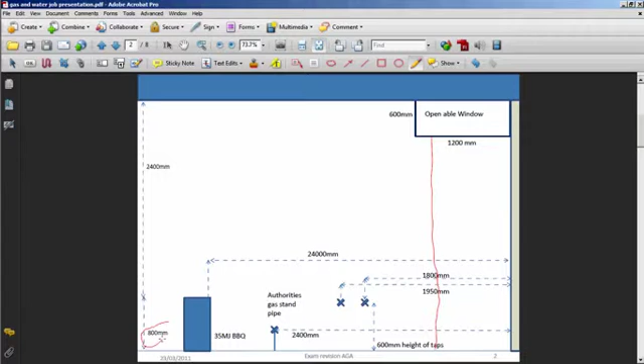Alright, make sure you take those two measurements into account when you're working out where you're going to put your hot water service.

Make a provision for the installation of the gas meter, which is getting at where you're going to bring your copper pipe up to meet for so the gas meter can be put on.

Should have a drawing in the front of your regs. So it's 330 from the authority standpipe to your standpipe, 200 off the ground, something like 200 mil off the wall. You should have that drawing in the front of your regs stuck in.

So that bit's easy. Use your minimum pipe sizes from the meter position to the hot water unit and leave a sealed branch. When they say a sealed branch, they're talking about a compression going to a male with a cap on the end. All right, don't just crimp and seal it, silver solder it.

Test the consumer piping as per the standard. Make sure you're on. It's all on your standard. You should have all that sorted out before you get to the exam.

With either of the appliances connected, or if they're not connected, what the operating pressure is, so you can work out how much you need to pressure test it too.

When you're sizing the pipe, make sure you're looking in the right column for the sizing. Don't fall into the trap of reading into the wrong column. You'll end up with the wrong pipe size.

Page 101 talks about flue clearances from the flue terminal. You need to look at that when you're putting your hot water service on the wall.

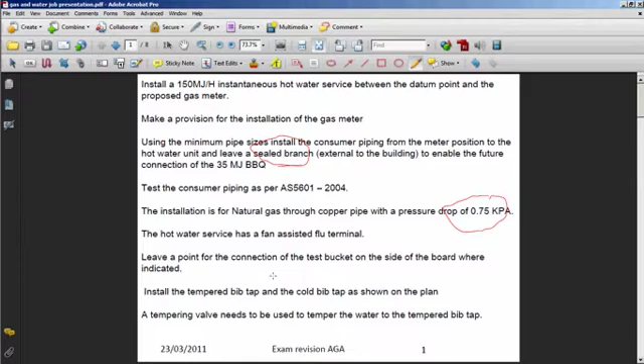Install a tempered bib tap. In the plan, your tempered bib tap's there, and that's your cold water tap. Install a tempering valve, needs to be used to temper the water to the tempered bib tap.

Right, so there's the plan. This is where you'll install the job. So the side of the board there is your datum point, and the door's there. So you got to make sure you got your clearances away from there. Your window works out to be way up here somewhere.

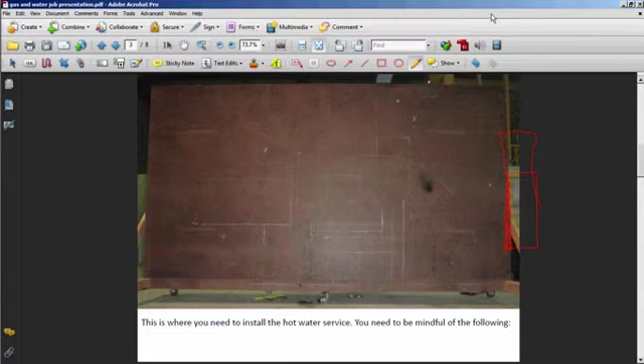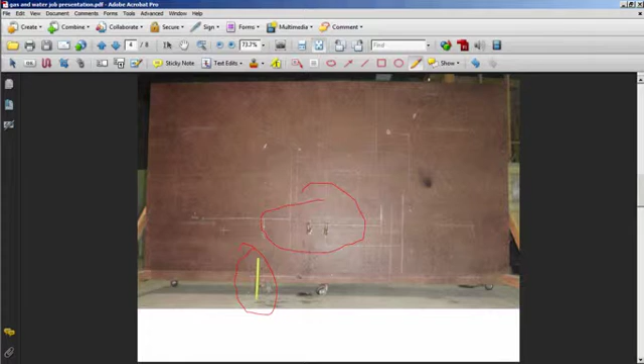First thing I do is stick your taps on and stick the gas authority's pipe on, because those points are fixed. You're best off putting your fixed points in first, so you got something to work from.

I've put my hot water service in underneath the window, and I've got my clearance from the door, the page 101 your standard. I've stuck it there rather than over here somewhere away from the window.

Because as soon as you stick it over here somewhere, the job becomes very jammed. You've got a lot of pipes in a small sort of space, and it's hard to make it look neat. So you're best off where you can, spacing the job out a bit to make it a lot easier to work to.

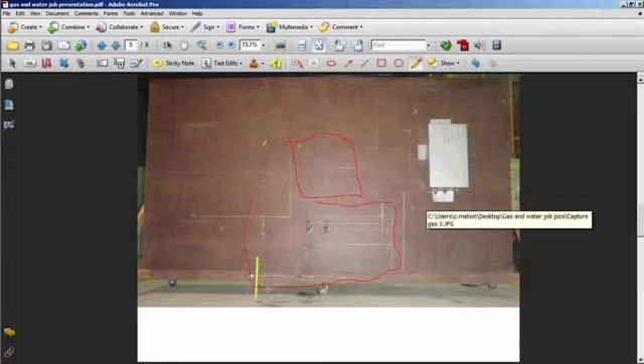From that spot there, I'd write on the board with some of the white engineering chalk where you're going to run the pipes.

A little bit of planning at the start of the job makes the whole job run a lot better, because then you're just following the plan, then making your pipes up to suit what you've got on the wall already, what you've got drawn on the board.

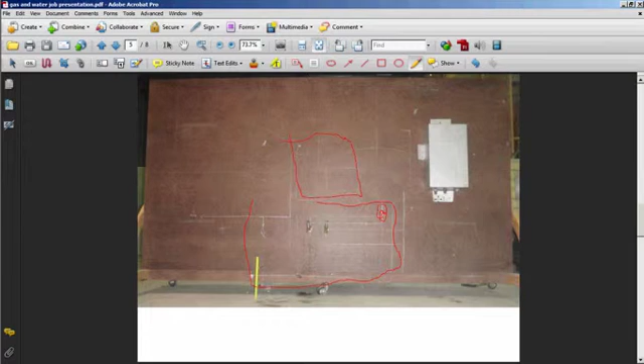Don't fall into the trap of just getting there and blasting in and throwing your water pipes there and thinking, oh geez, where am I going to run the gas now? I've mucked myself up, and then you're backstepping.

Okay, now I've got all my pipes drawn on the map, drawn on the board. I know where I'm going.

I always go about installing my cold water line first, mainly because once I've got it all planned out, the gas line's fairly easy to run afterwards.

Once I've finished the cold water line, I've just left a point there. If you can, you should put it on test as soon as you get the chance, then by the time you finish the whole job, if any water leaks are there, they'll be fairly evident by the time you're finished.

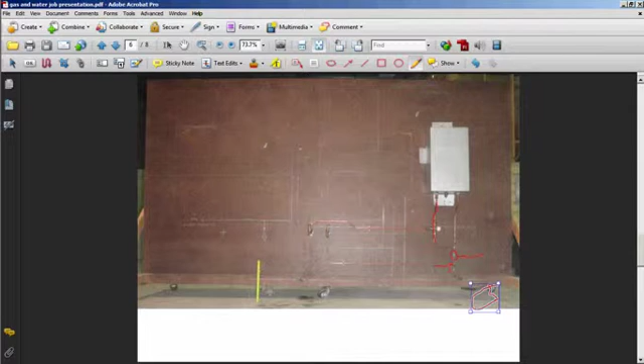With the isolation of the unit, I've got the valve there, a little 1/2 inch full flow valve. The reason it's there is because of the fittings you get given, you need to have that in. That's a 3/4 inch line, so you need to change to 1/2 inch. So that T there is a 3/4 half T.

Half goes to your cold water line and half up to your hot water service. You need to make sure you've got the isolation valve in a spot where you can isolate the tempering valve and isolate the hot water service. Usually you're told you're not meant to tee off a 1/2 inch cold water line, but because the tempering valve isn't classed as a fixture, it's the only place you're actually allowed to tee off to the tempering valve off a 1/2 inch line.

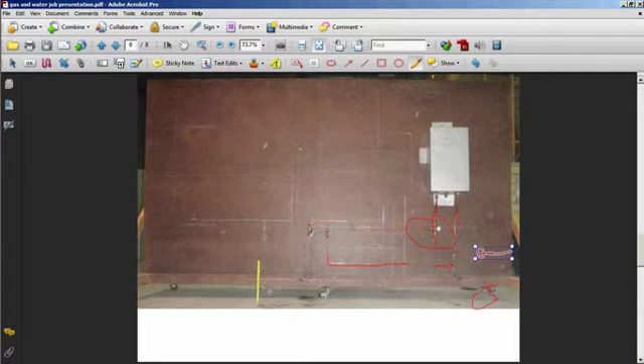You just need to make sure you also have means of isolation for the tempering valve and the hot water service. When you're testing the cold water line, a bit of tissue works best, because then you can go around and test each joint with it, and a bit of tissue will show up the slightest weep.

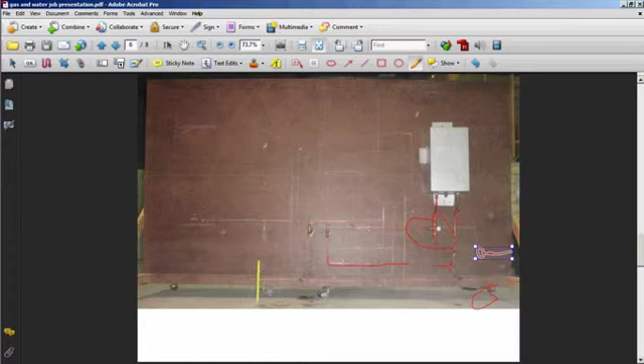When you're testing with a test bag, you need to make sure you pump it up to 1500 kPa, or you just connect it to the water supply from a hose or something.

Now comes time to put the gas pipe on the wall. You should always do a little sizing like this. You've got your part A, that's your meter, going to the first T, then the hot water service, then the barbecue. You should always do this little pipe size drawing somewhere near your job, so the examiner sees that you actually know what's going on.

Don't fall into the trap of copying the bloke next to you, because depending on the pressure drop of the job, and depending on what megajoules this appliance is, this could either be 15 or 20 mil. So make sure you work out the pipe sizing for yourself.

The main run will be the distance from the meter to the barbecue, which is from the meter to the furthest away appliance. That's always your main run. In this case, it's 24 meters. So make sure, again, you're looking in the right table for the pipe sizing.

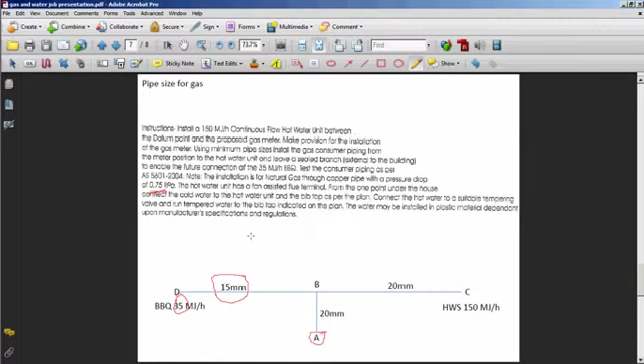When you're testing the installation, you'll test it from the point of the standpipe there. Make sure you listen carefully to the examiner's instructions, because depending on whether the appliance is connected or not, and depending on the operating pressure of the fitting line, there are a few different factors in play when you're testing the fitting line.

It's just a matter of going to that part in your standard under testing and making sure you're reading the right bit.

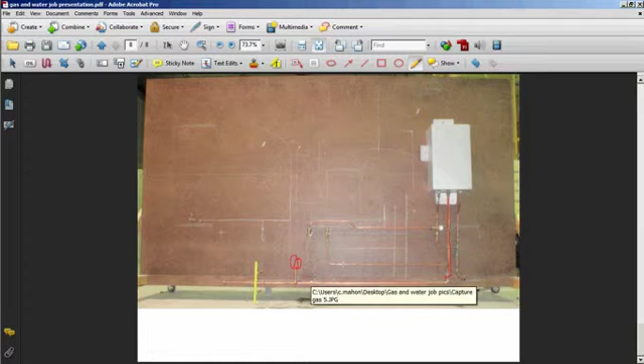If you've got any leaks, use soapy bubbles to test it. Find your leak. Make sure you've got your isolation valve on, going to the hot water service for your gas.

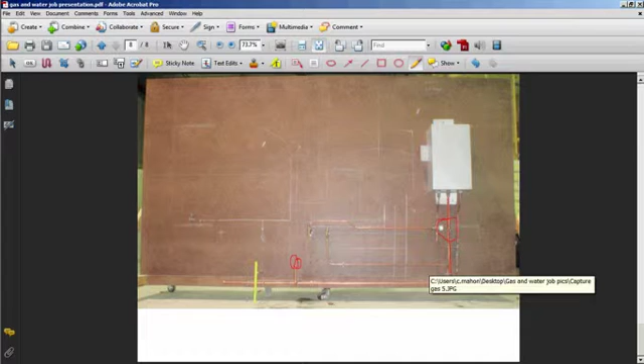Again, this whole job is about planning it out at the start. I've seen lots of blokes muck it up because they get there, and before they do any planning, they just start chucking pipes on the wall. Then they find that, oh geez, I've got a pipe that's got to get over to here, and I've got to jump over pipes, and it looks terrible, hard to get it straight. You spend 10 minutes at the start of the job working out where you're going to run all your pipes.

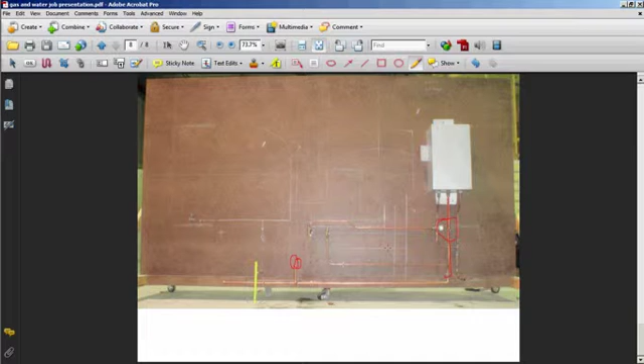It makes the whole thing a lot better, because once you've worked out on the board where you're going to run all your pipes, you just follow the plan. It's all easy. I've seen blokes do this job in 2 hours. You've got 6 hours in the exam. I've seen them do it in 2 and then do it easy, because they've planned it out really well at the start.

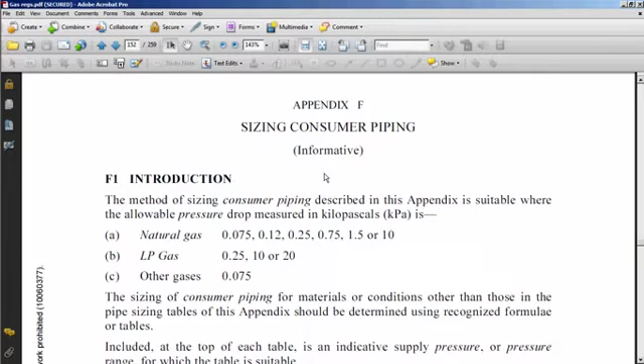Okay, here's sizing the consumer piping. That job on the wall should always go through that little pipe sizing process in Appendix F, it all runs through it. If you read through Appendix F and do as it says, there should not be a hassle.

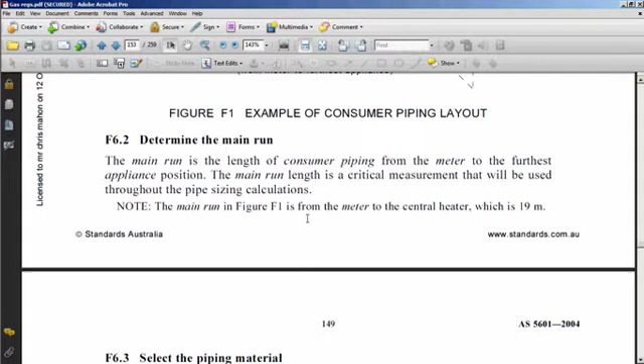Things to watch for: determining the main run, which will be from the meter to that furthest away appliance. In this case, it's the barbecue. Once you've found your main run, you stay in the column for the main run.

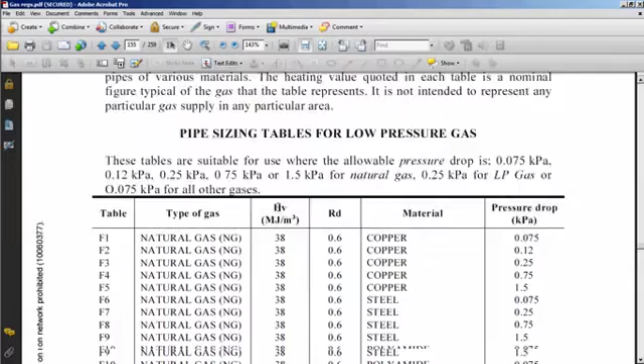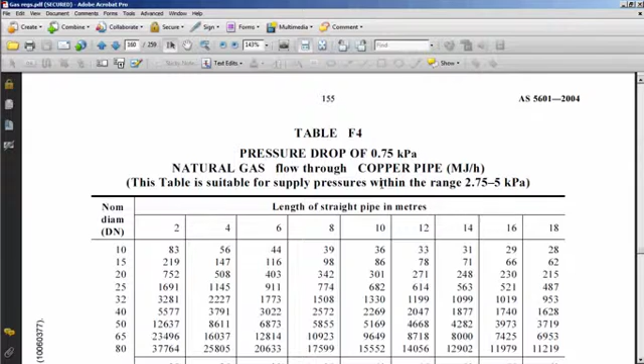Here's the table. In the job, they've given you a pressure drop of 0.75 kPa. You've got natural gas and it's flowing through copper pipe. Come down to your main run. In the job, it's 24, so you've got to jump up to 25.

So with the hot water service and the barbecue, from section A to B you've got more than your 54, so you've got to run it in 20 mil. Run into your hot water service, you've still got more than 54, so you still stay in the 20 mil. When you tee off the other way to your barbecue, that's when you can drop down to 15, because you can run 54 megs in 15 mil, and the barbecue is only 35.

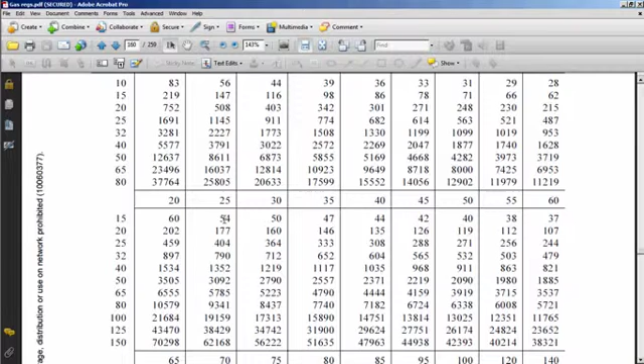The sizing should be the easy part of that job, and you should have it down pat before you get to the exam. Okay, this is pressure testing a gas installation.

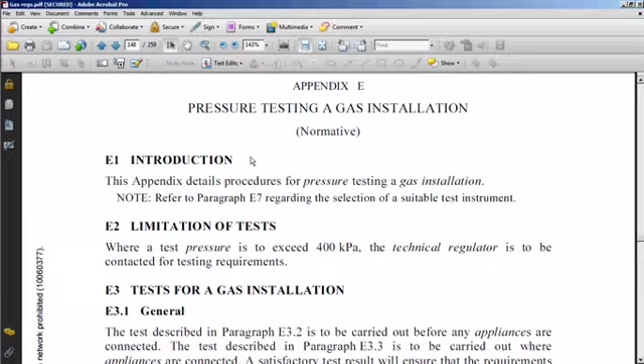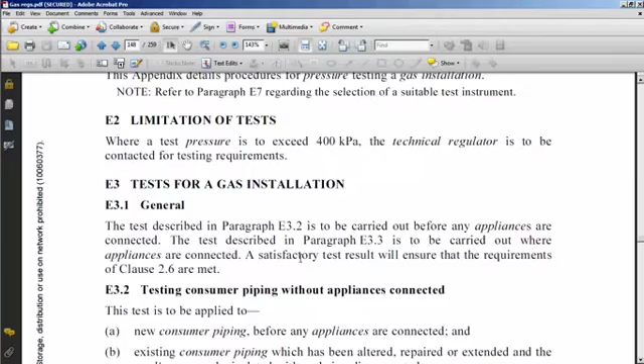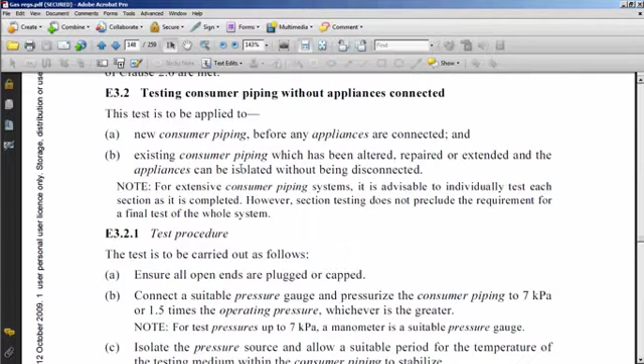When you go to pressure test your installation, there's two sections you need to refer to. You've got testing consumer piping without appliances connected, and you've also got testing consumer piping with appliances connected. This details the procedure you need to go through when testing it.

Connecting a suitable pressure gauge and pressurize the consumer piping to 7 kPa or 1.5 times the operating pressure, whichever is greater. If the examiner comes to you and says the operating pressure of your gas fitting line is going to be 6 kPa, you need to take 6 kPa times 1.5, which gives you 9 kPa. 9 kPa is greater than 7 kPa, so you need to test the fitting line to 9 kPa.

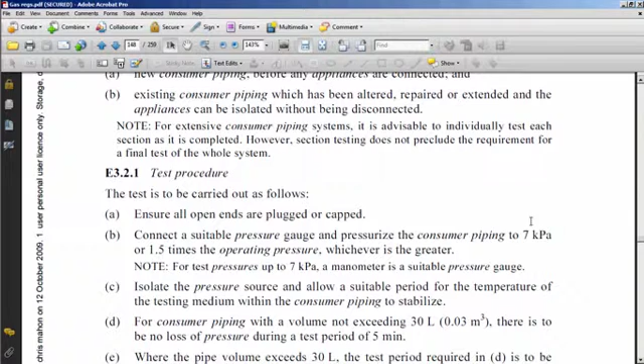If the examiner comes to you and says the operating pressure of the fitting line is going to be 1.1 kPa, 1.1 times 1.5 is not greater than 7 kPa, so you would need to test the fitting line at 7 kPa.

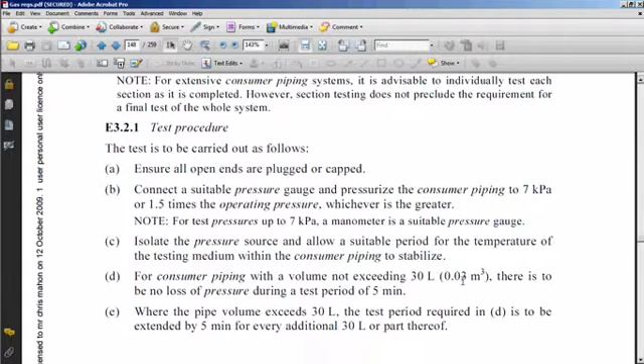For consumer piping with a volume not exceeding 30 litres, there is to be no loss of pressure during a test period of 5 minutes. Where the pipe volume exceeds 30 litres, the test period is to be extended by 5 minutes for every additional 30 litres or part thereof.

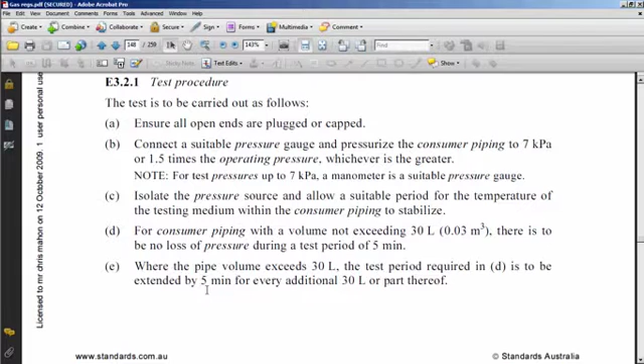So if the examiner comes to you and says your installation is 77 litres, you need to go: that's one lot of 30. Another lot of 30 is going to be 60. You still haven't got your 77 litres, so you need to go to 90 litres. So you've got 3 sets of 30 litres. 3 times 5 is going to be 15, so you need to pressure test the installation for 15 minutes.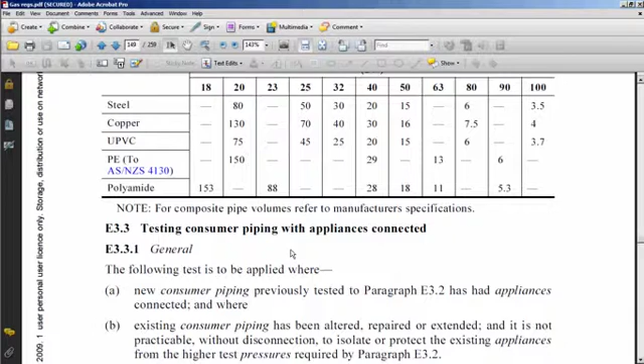Then we come to testing consumer piping with appliances connected. Same deal again. This is the main clause you need to worry about here: subject the consumer piping to operating pressure.

So the examiner may come to you and say the operating pressure of this fitting line is 1.1 kPa, with appliances connected, please pressure test the installation. So you need to subject the consumer piping to operating pressure. If the operating pressure is 1.1, you test it to 1.1, which is the operating pressure.

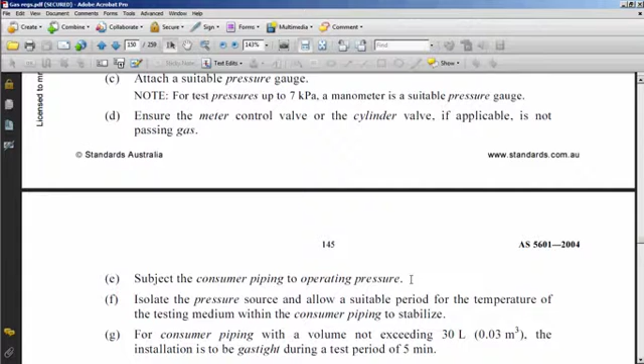Same as above with the amount of time you need to test it for. If it was 62 litres of pipe volume, you'd have 30, 60, still haven't got your 62, so you've got to go to 90. You've got 3 lots of 30 in that, 3 times 5 is 15 minutes, so you need a pressure test installation for 15 minutes.